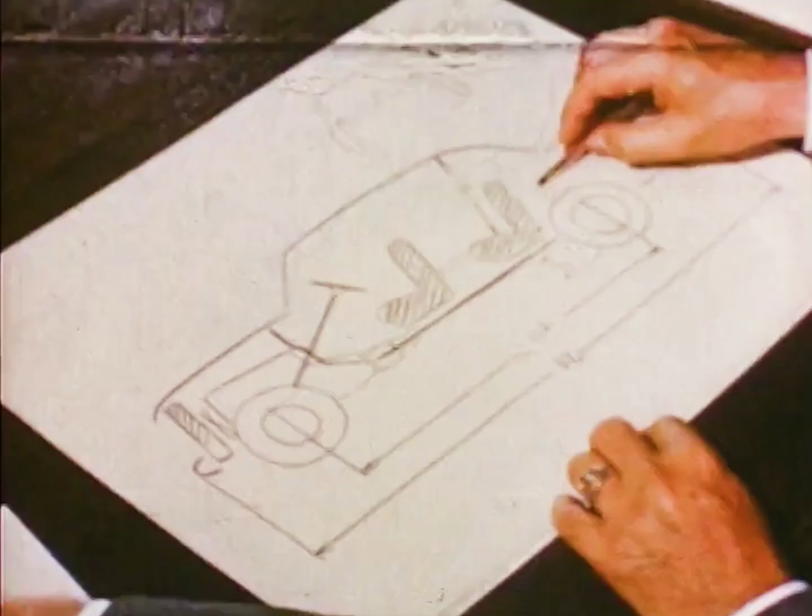The car is designed from the inside out. The idea is to move everything forward so that the passengers in the back seat are riding ahead of the rear wheels. Then we can bring the overall height down and have even more room inside.

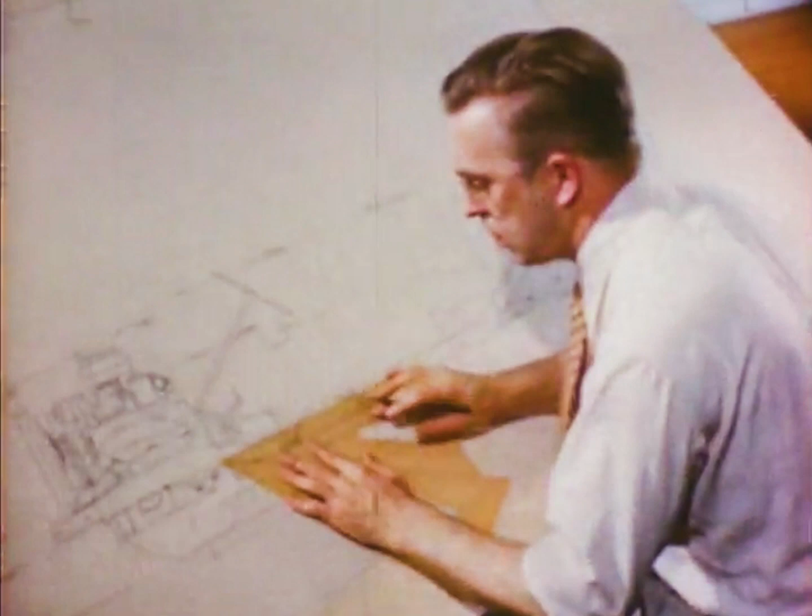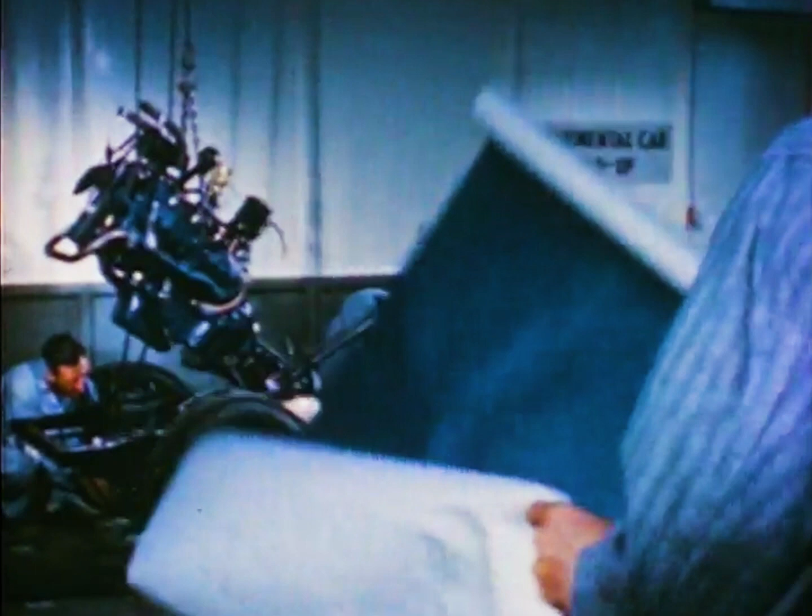So here is the idea. A motor car conceived as a space for the riders. Space that is to be enclosed and powered to move from one place to another, more comfortably and with greater pleasure. It's really more than a new automobile design. It's new horizons. It's freedom of movement for the people who will one day drive it and ride in it, who will value it as a possession second only to the homes in which they live. But that day is 2 years away.

While we've been looking on, already months have slipped by. Not long ago, a few men had the idea to themselves. Now dozens of people are teaming up to develop it. As yet, no one knows what the car designed from the inside out is going to look like. But they're dreaming practical dreams on the subject, dreams that are kept under lock and key.

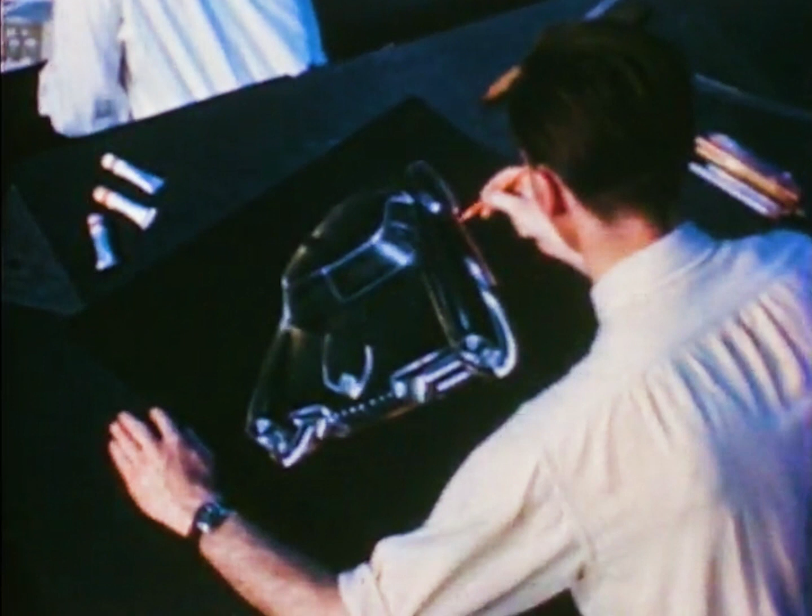Designers are getting these dreams down on paper, drawing outlines around them, and filling them in with color. Is this the car? Is this what it will look like? Well, perhaps the sweep of a fender, the curve of a top, the lines of a hood. Perhaps one segment of a form will develop after weeks of capturing dream cars on paper.

Finally, they arrive at something that may be a composite of the visions in 100 fertile minds. This is worth developing. This may be the body outline that is to be familiar on every street and every road in the land. It's a long time now since the idea first went down on paper.

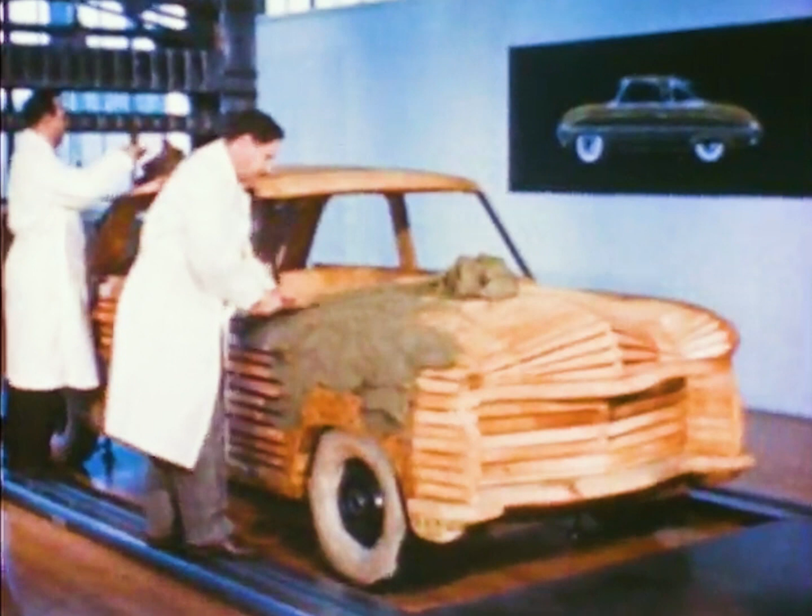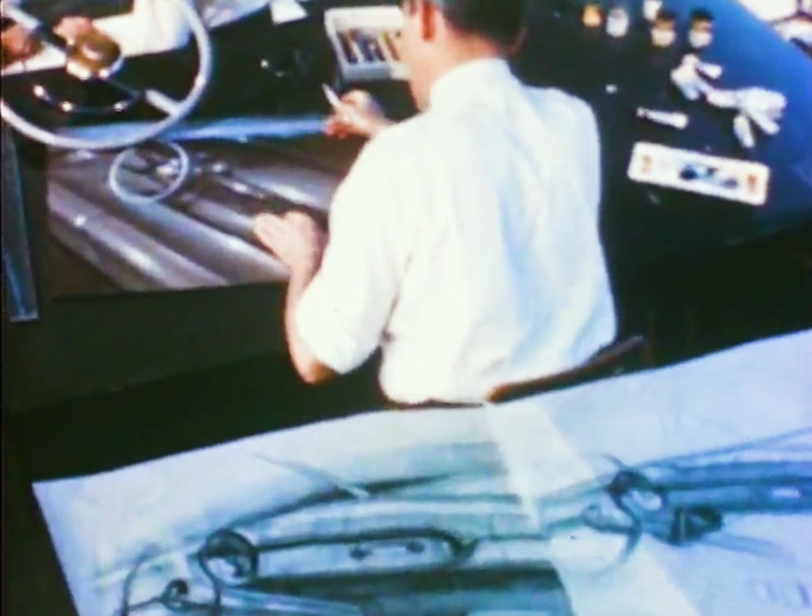The idea takes form and dimension in quarter scale. It's time to shape it up full size in clay so other minds can work on it, so they can walk around it and talk about it. Something else has happened to the original dream. They've broken it down to the fine points, and other people are having ideas on the details.

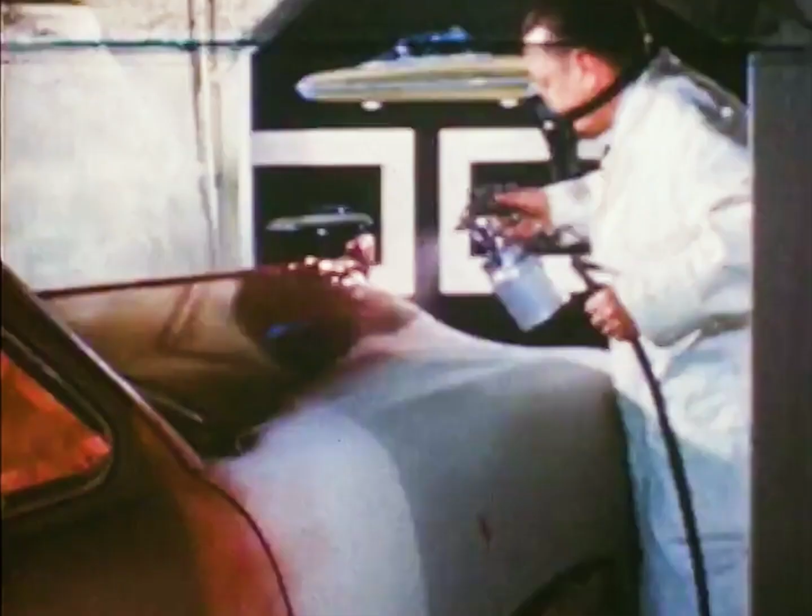So the idea travels and grows, taking shape in the feel and texture of fabric. Taking color from studies of what people like, studies in fine variations of shades. Finally, the idea is approaching full form, and they spray color on the clay mock-ups, color and trim, to get them ready for the hour of decision.

In less than a year, the idea has come a long way. We have developed 2 full-size clay versions of it, and the men who will guide the production of the car, the men who will advertise it and sell it, have the final say at this point. They have to study the idea and think, how will it look in the showroom?

How will it look on the highway, going shopping down Elm Street, driving to the picnic on Sunday afternoon? How will it look parked in the driveway? How much will it cost? They make the final decision, and the idea is on its way to becoming an automobile. But it's an automobile still a long way from production.

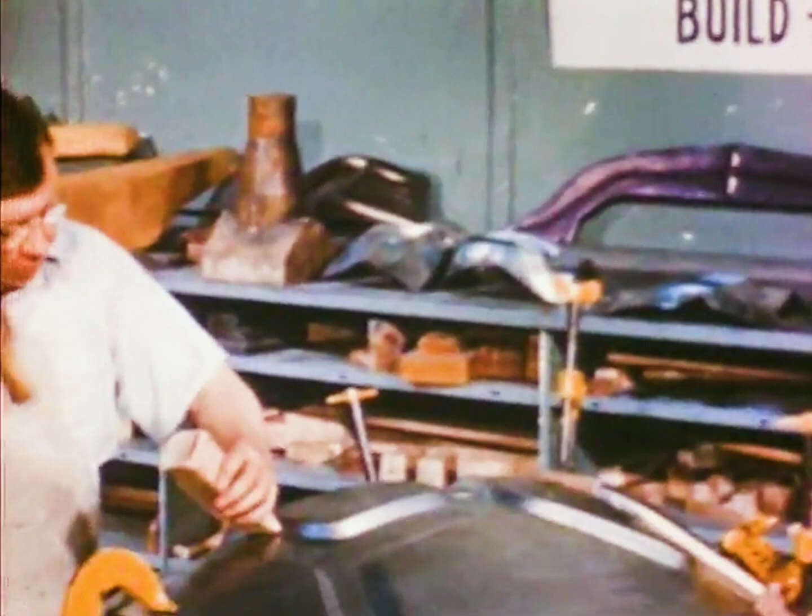From clay mock-ups, they go to handmade test cars, hammered to shape on wooden forms. Not as perfect as production cars, but something that can be driven and tried out. Yes, a long way from the final product, but transition from the old to the new has begun.

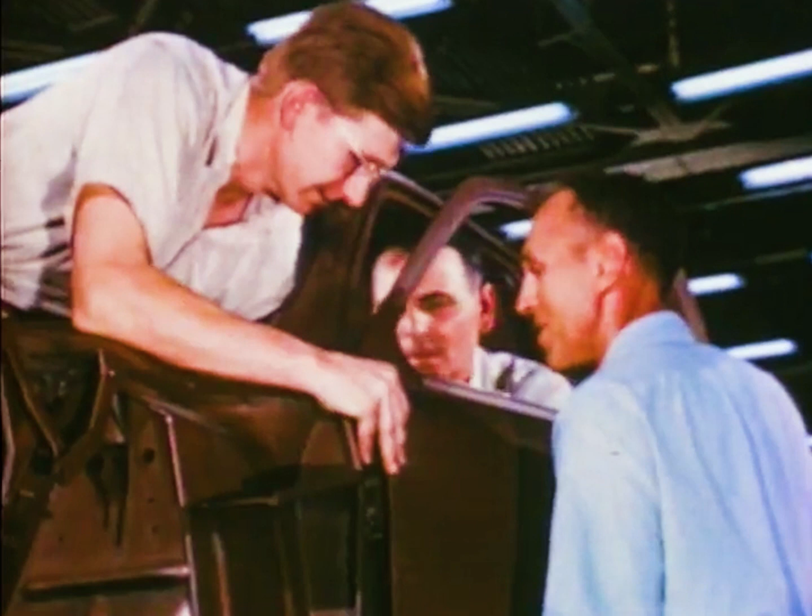Then a great moment arrives. The shape of the new comes out into the light of day. And now a dream that was born in silence feels power in its veins and comes to life. They give it a number and a clean page on which to write the story of its life. And they start it out onto the test track.

There will be more test cars, dozens more. They will go on hour after hour, day after day, week after week, over good roads for speed and bad roads to break them down, over a road that goes round and round in a circle, but which leads to new horizons for people all over the world.

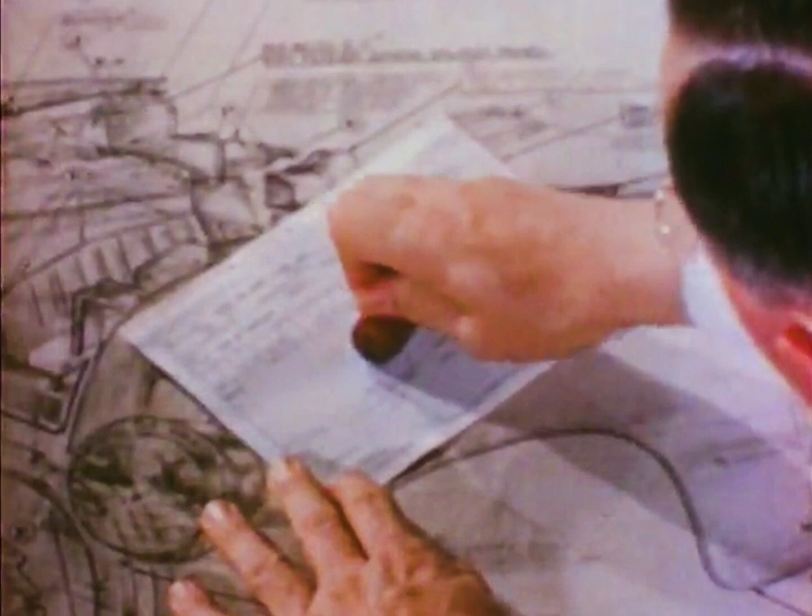It was relatively easy to sketch the original idea on paper. But now that it's a motor car going into production, now that its plans and specifications must pass through hundreds of minds and hands, it's being translated into precise mechanical lines on thousands of sheets of paper.

These men with their keen pencils will have to prescribe how to line up bolt holes, and fabricated steel parts to be welded. They will have to diagram where to drill 900 other holes and profile a lot of odd shapes and angles.

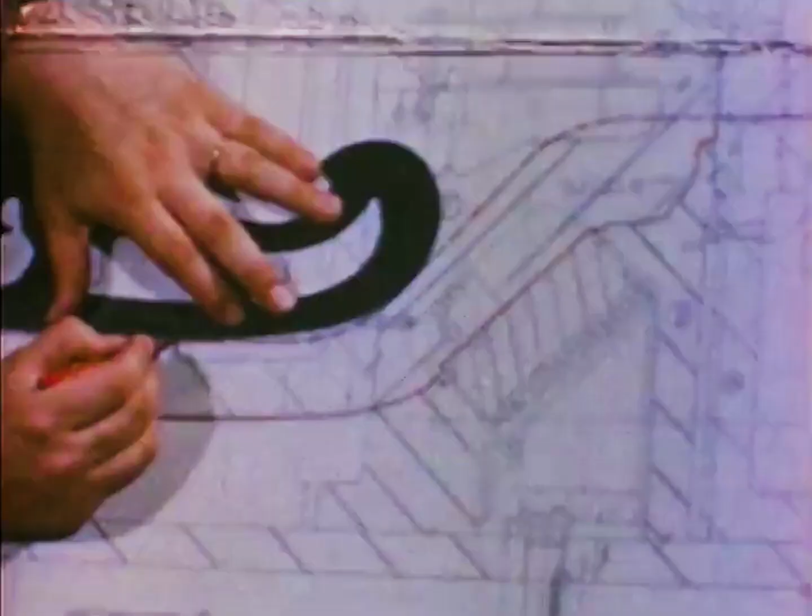Now, it happens that you need more than hammers, screwdrivers, and socket wrenches to build a car. So more scores of hands and brains go to work designing special tools, the kind of tools that may weigh up to 70 tons apiece. This is one of them. It is designed to press out the shape of an automobile top from a tough steel sheet.

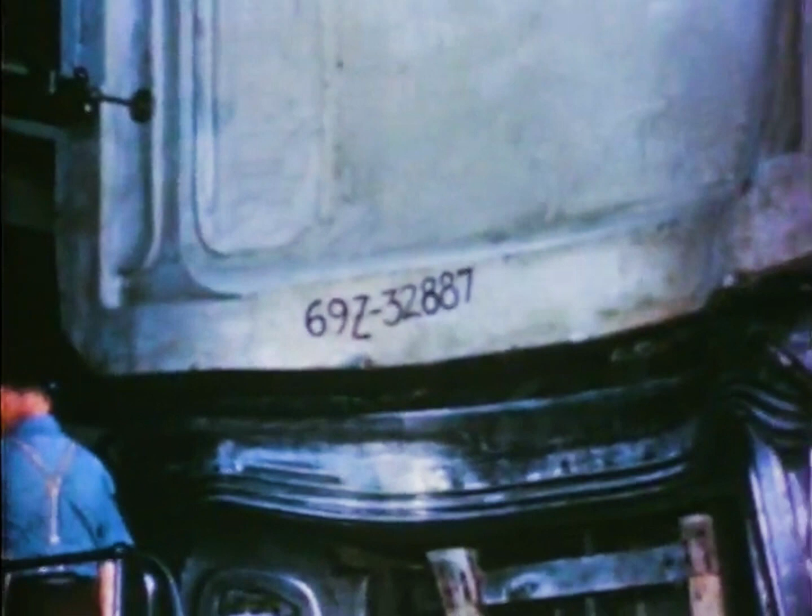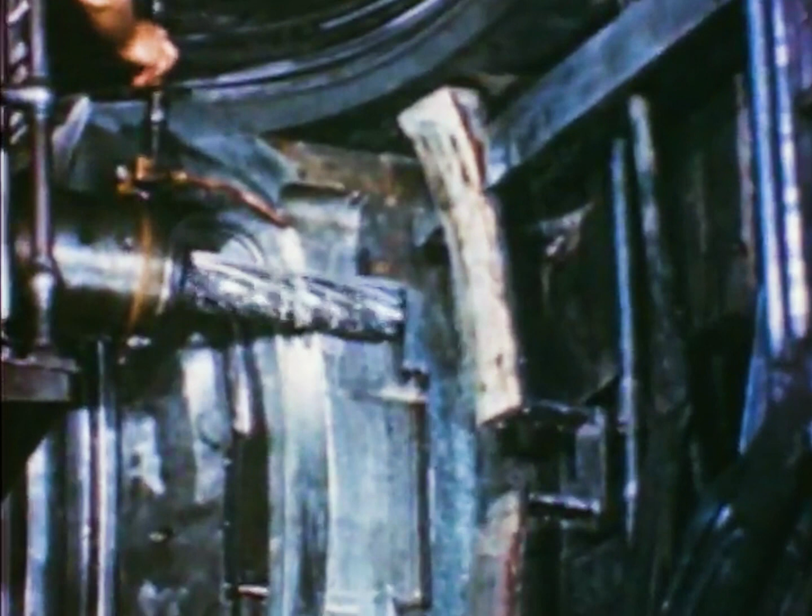From paper plans, they mock up the die in plaster. Then the tool and die men hang it up and use it for a pattern, while their machine traces over the form and digs its counterpart out of a block of steel. As much as 9 months' time is required to profile the metal die for the roof panel alone.

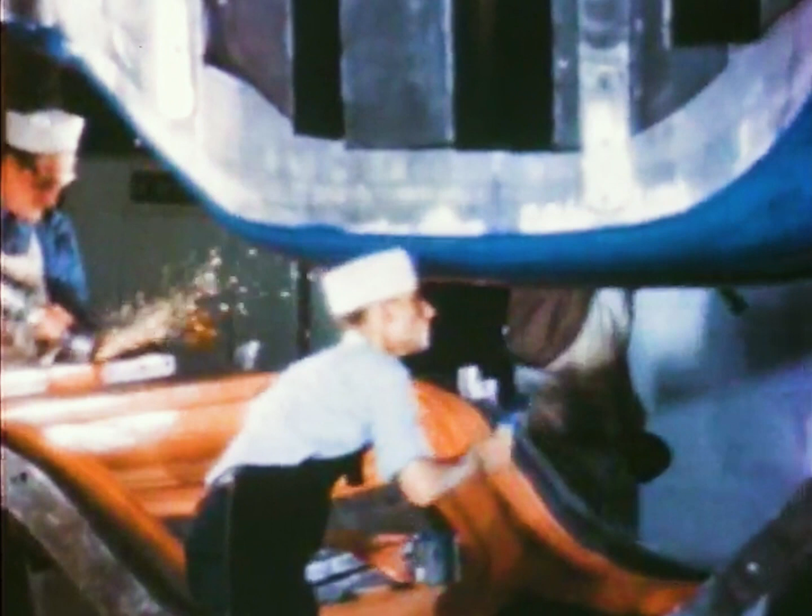They work these dies over for weeks, dressing them down, grinding and polishing them, until they come within a fraction of an inch of touching in the press. What they have produced is something that will take steel strip in its jaws and shape a section of a car body. They develop dies for fenders, for tops, for side panels, and for floor pans.

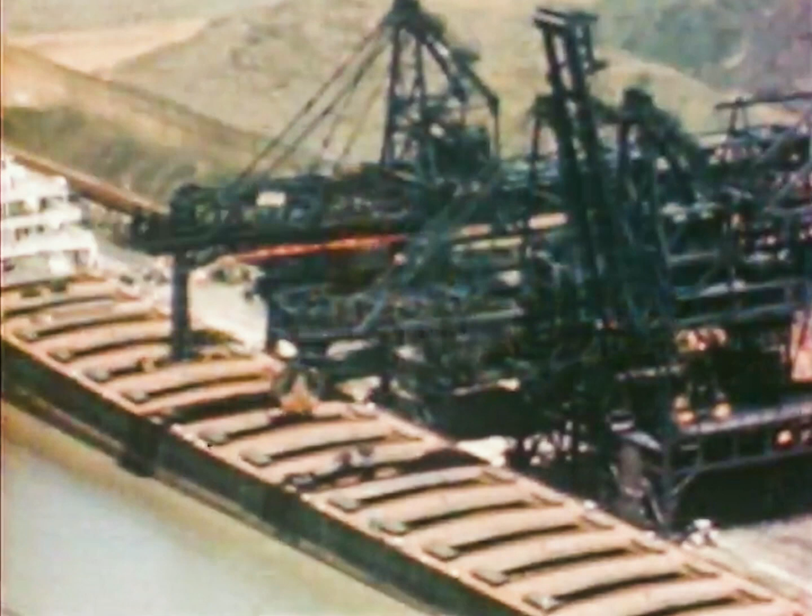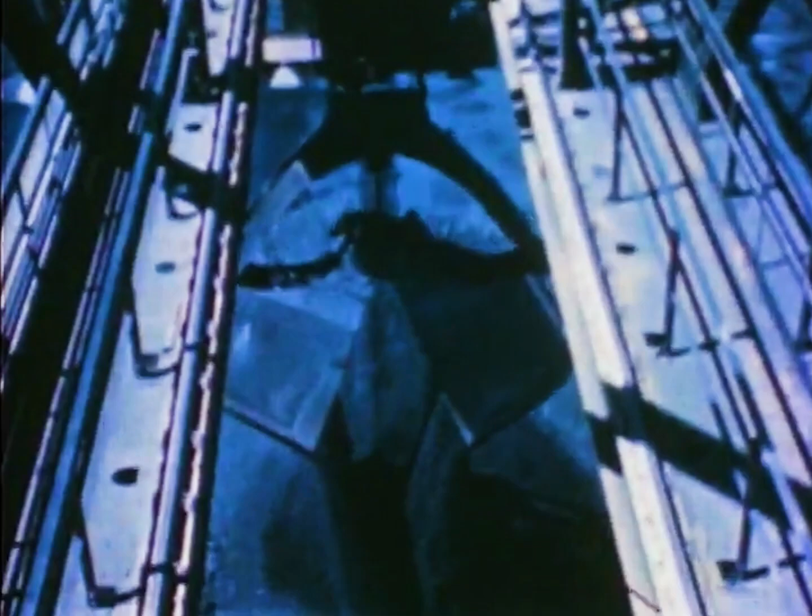It's hard to remember now that there was a time when the car was no more than an idea. The operation is spreading out. Red ore, iron from Mesabi, by the thousands of tons, is disturbed from its primeval bed in the Iron Range to become automobiles that will be familiar on roads all over the nation. Limestone, coal, a lot of earth substances have been dug up and transported to make a dream come true.